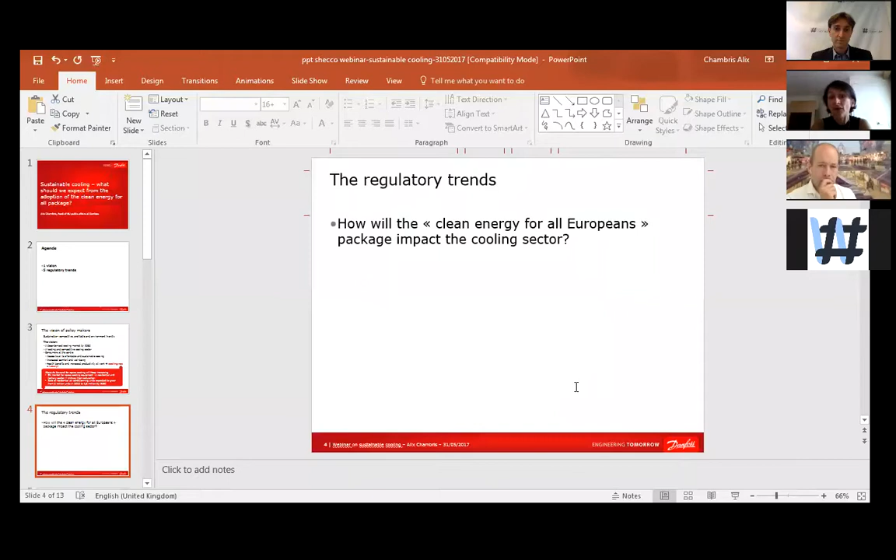And this is what the winter package, or so-called Clean Energy for All package, should help to deliver. So, five regulatory trends: how will the Clean Energy for All Europeans package impact the sector? Trend number one is that it will decrease the cooling demand, the relative cooling demand, at the building level. This trend will be driven by the Energy Performance of Buildings Directive and the Energy Efficiency Directive. If you need details, I can reply in the Q&A session.

So basically, there is a goal that the building stock should be fully decarbonized by 2050, that all new buildings should be nearly zero energy buildings starting in 2018 for public buildings and 2020 for all new buildings. And this will greatly impact the cooling demand and also products, because in highly insulated buildings it has a mixed trend. On one side, it should decrease the relative cooling demand.

On the other hand, in some cases it leads to the opposite effect, because of internal heat gains.

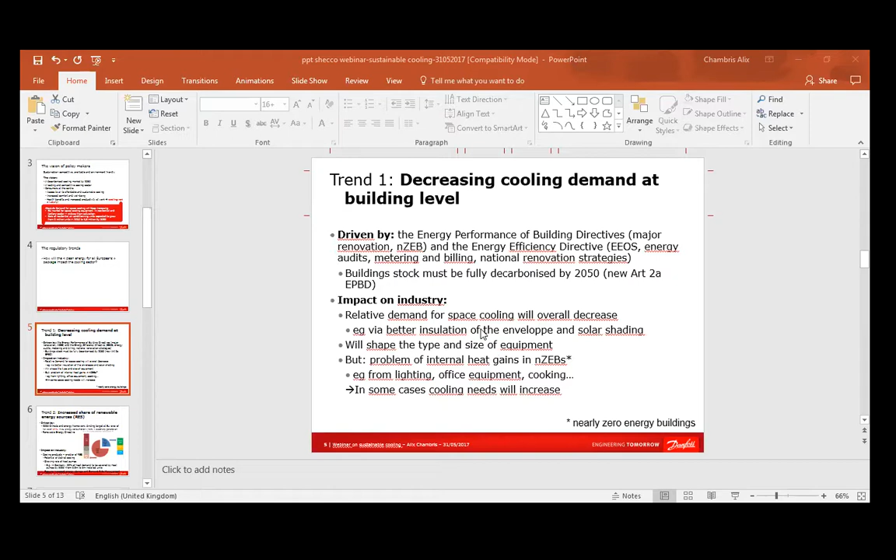And this will, as I said, impact product development for us. The next trend is increased share of renewable energy sources.

Someone is playing with my slides. I think we just put your slide on full screen. Ah, that's why. Okay, thank you.

So the increased share of renewable energy sources in the 2030 Climate and Energy Framework, it is already agreed that we should reach a binding 27% share of renewable energy in total EU energy consumption, leading to 45% in electricity generation. So this is quite an ambitious target. It might be even further increased within the negotiation on the Renewable Energy Directive. And this will also have a huge impact on the cooling sector for several reasons.

First, cooling products are enablers of renewable energy sources, and this means that heat pumps will gain a growing role. I will not talk too much about heat pumps because I know that Thomas Nowak will do it.

It means also that district cooling has a major role to play, and we have the example of Paris, where they developed a wide district cooling grid, very efficient, using the temperature differential of the river Seine. So again, the same for district cooling. I will not go into detail because Ingo will probably do that for us.

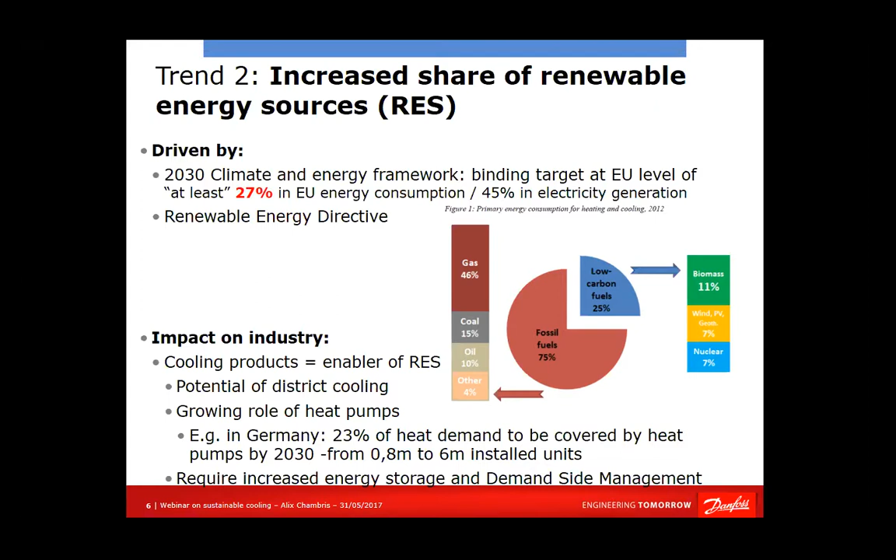And then, of course, a growing share of renewable energy sources means increased need for energy storage and demand-side management. I will come back to that later.

Another trend is the trend for more efficient and sustainable products, as already mentioned before. This is mainly driven by eco-design and energy labeling directives. What is important to know is that eco-design and energy labeling directives were stalled for a while, and within the Clean Energy for All package that was released at the end of November, the European Commission finally released the eco-design work plan. This means that work will keep on in this field.

Here I have listed some of the products that will be impacted. So the work on commercial refrigeration will keep going, as well as smart appliances. The work plan also defines new product groups that will be regulated under the eco-design and energy labeling framework, and that includes, for the cooling sector, refrigerated containers and building automation and controls.

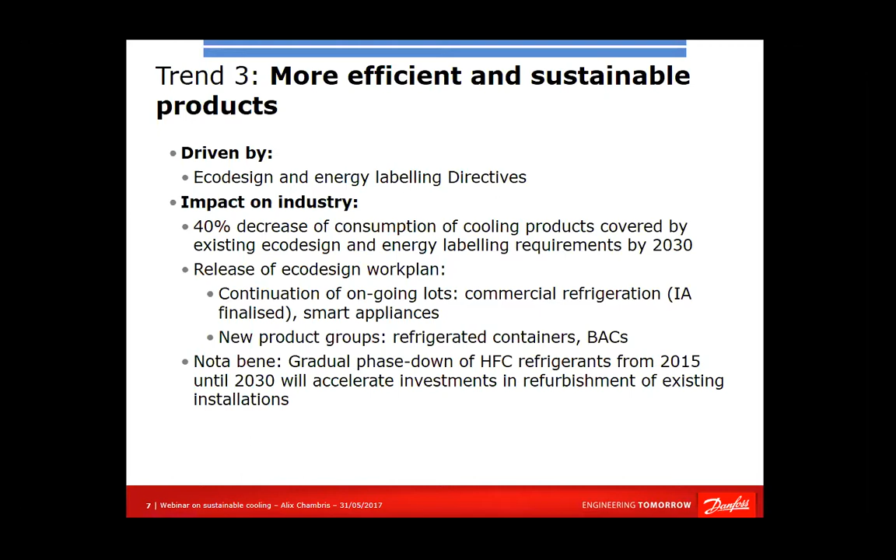And then I would like to emphasize that the gradual phase down of HFC refrigerants, set in the F-gas regulation, will also accelerate the market penetration of efficient and sustainable products, because it would speed up the refurbishment of existing installations. So this is rather positive for our sector.

Trend number 4, system approach. Eco-design and energy labeling have had a huge impact. They have led to a decrease estimated at around 40% of the energy consumption of covered products by 2030.

On the other hand, eco-design is only the first step. The next big game changer is a system approach. And the Clean Energy Package will really promote and accelerate optimization at system level. That's what we are convinced of.

The main drivers are Articles 8 and 15 of the Energy Performance of Buildings Directive, which promote the adoption of energy performance requirements for cooling systems, strengthening of inspection requirements, and, as an alternative, mandatory requirements on building automation and controls. The impact on the industry will be huge, both in terms of competitiveness, because you have huge efficiency gains to be gained from a system approach.

Another step change is the integration of heating and cooling. What is very important in this system thinking is the recovery of unavoidable waste heat in two directions. Cooling processes produce heat, and you can recover that heat, for example, for space heating. In a local supermarket in Denmark, the recovery of waste heat produced by the cooling process allowed annual savings on gas of 27,000 euros per year. So this has a direct impact on the bottom line of supermarkets.

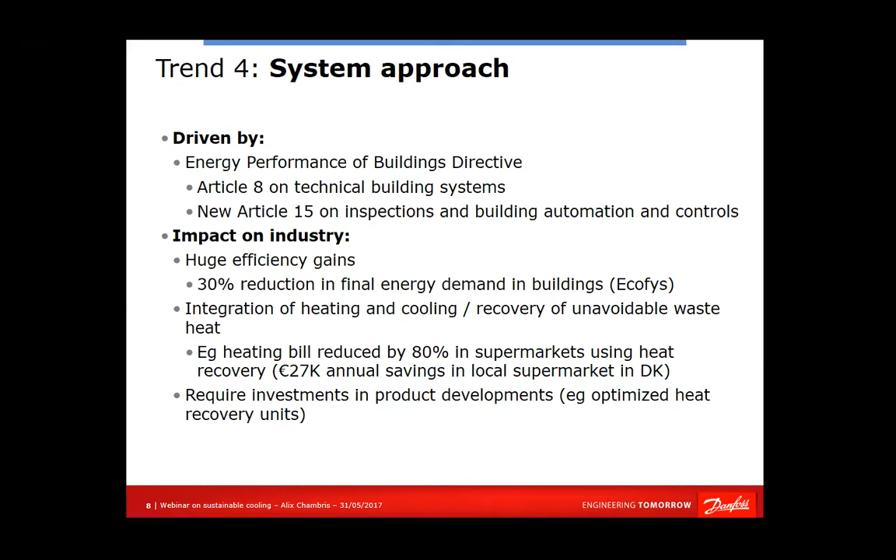But waste heat recovery can also be used in non-electrical cooling processes for cooling purposes. So this is a huge potential that requires from us, as an industry, a change of mindset and also investments in product development, for example optimized heat recovery units.

And the final trend I would like to emphasize is the growing digitalization that will be enabled by the package and sector coupling. This will be driven by the electricity market design regulatory framework and again the Energy Performance of Buildings Directive. So the impact on the industry, I have little time, so we can discuss that in the Q&A. Connected product, big data, Internet of Things, those are the buzzwords.

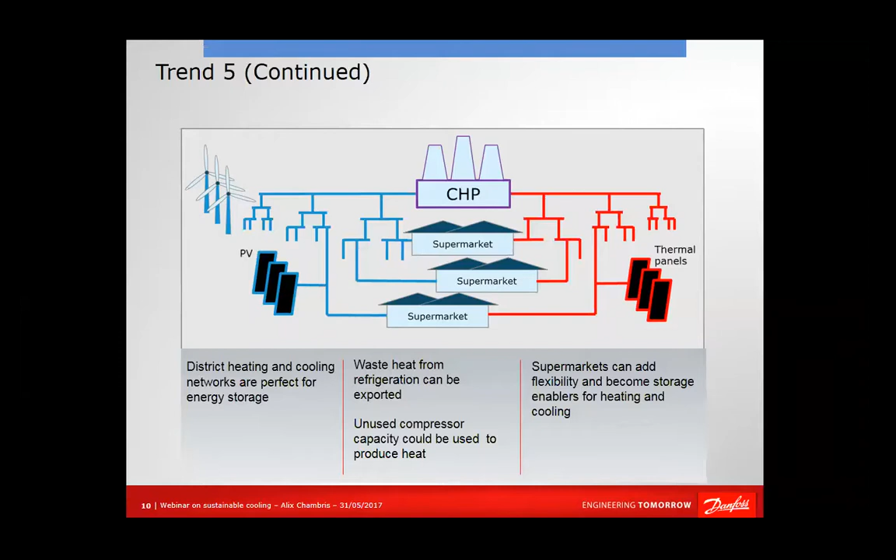There is much more. Another huge potential is the sector coupling. And here you see a picture of a supermarket to explain the vision. Supermarkets, for example, they can be turned into micro power plants. They can be used to store energy, to produce energy, for demand side management. So this is the next game changer in the upcoming decade.

So to conclude, I believe the Clean Energy for All package will bring four game changers in our sector. This is the system approach, the integration of heating and cooling, sector coupling, and the digitalization. Thank you very much.

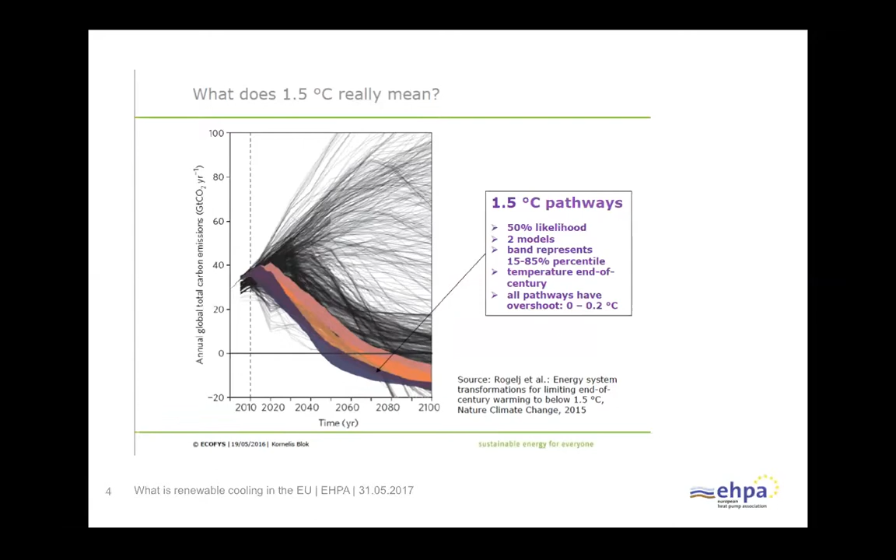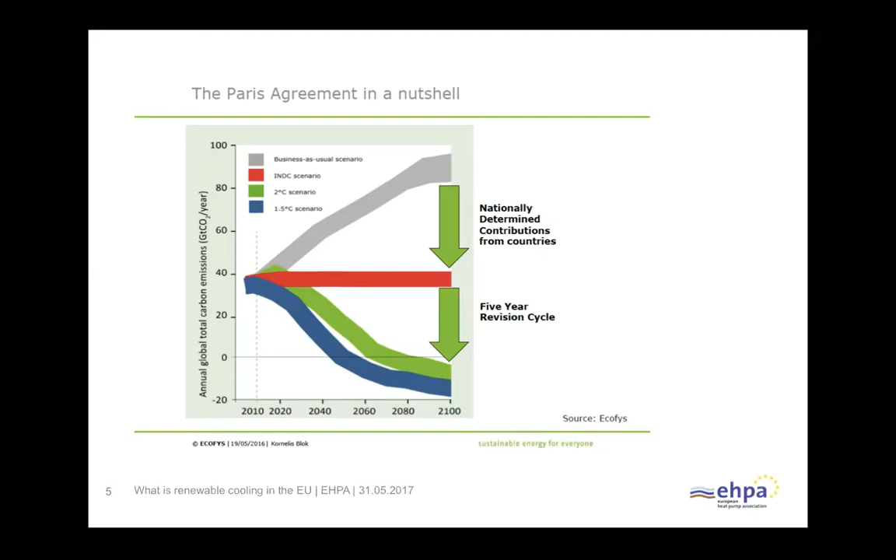And it's quite a distance between what would happen as business as usual, which is still supported by some people even here in Brussels, and what is necessary. You could say it's a full swing, a full turn of the whole industry. Next slide, please.

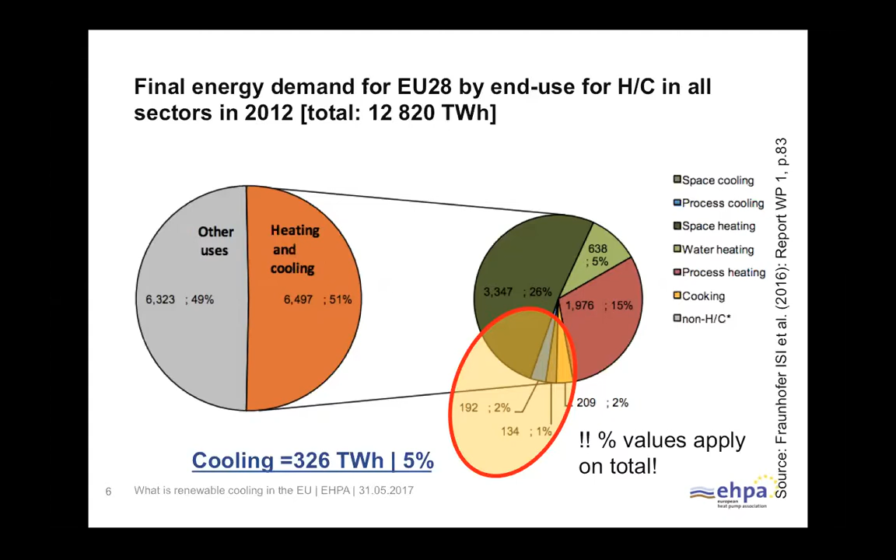And if we don't finish the heating sector in decarbonization terms, then we'll not achieve anything with addressing cooling. So it's very important to integrate the two and to go forward in the direction of the systems approach that also Alex has mentioned. Next slide, please.

So my interim conclusion on this is that we cannot decarbonize society, which is necessary, if we don't address heating and cooling. And we are also convinced, also in this group, that typically we have all the technologies available.

We know how to insulate a building. We also know how to cool it. We know how to do this with renewable energy. And so we don't really need additional technical innovation, but we need a legal framework that makes it attractive to use renewable and no-emission sources to provide heating and cooling to Europe. Next, please.

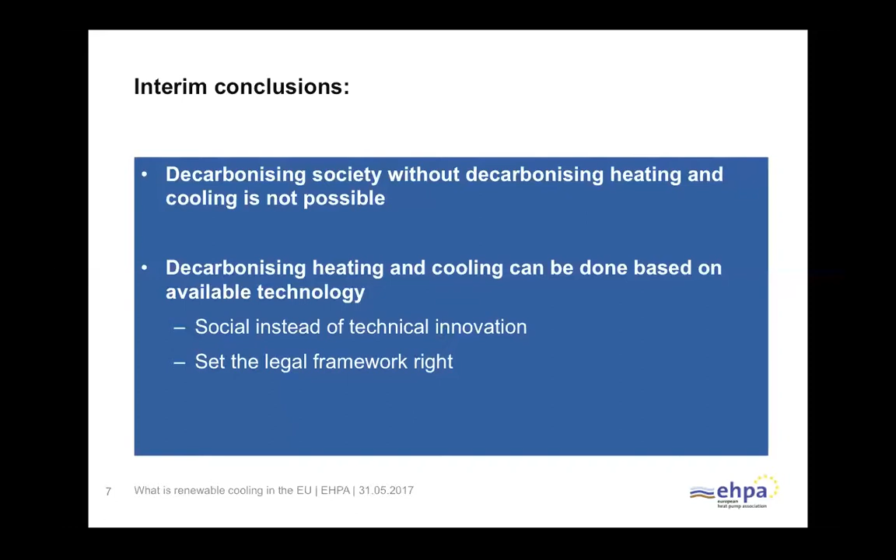And that is the really limiting factor, because the speed of change that we see at the moment here in Brussels, but maybe even worldwide, is not sufficient to achieve this. The renovation rate in buildings doesn't provide the necessary speed, and I guess in cooling it's the same. Next slide, please.

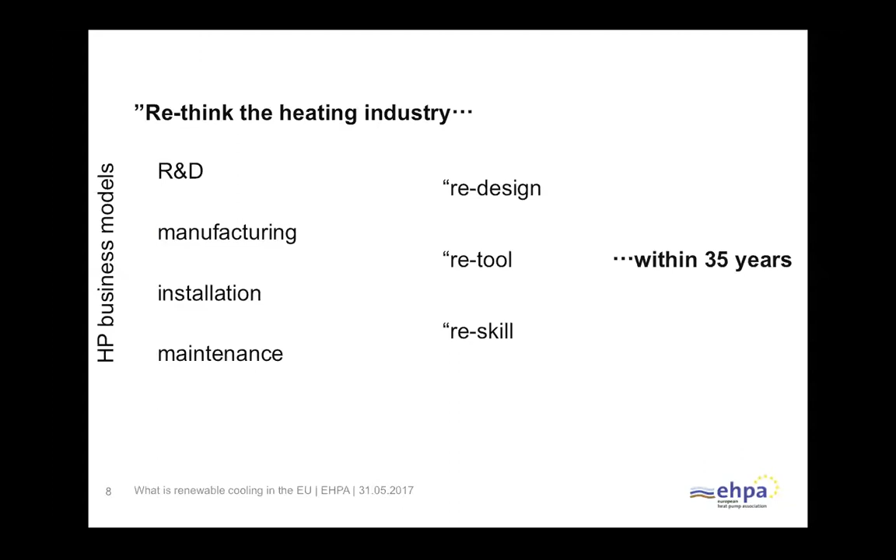So we created this DecarbHeat initiative, and the DecarbHeat initiative follows this vision of 100% decarbonized heating and cooling system in Europe by 2050. It has four components. It has an industry pledge that is signed by the major manufacturers of heating and cooling equipment, where they say we are ready to deliver.

It has a number of policy requests that go to policymakers saying, guys, you need to create a framework that makes it possible to align the individual decision makers' economic rationale and the 2 degrees centigrade global warming target. And then we have a support document that can be signed by many others that are not directly affected by renewable heating and cooling, but that are in line with the idea.

And as a next step, we will have an industry platform that is set up for fall. It will be set up in cooperation with the European Commission in order to determine how we can integrate the sectors in the most efficient way and how we can really achieve a decarbonized sector by 2050.

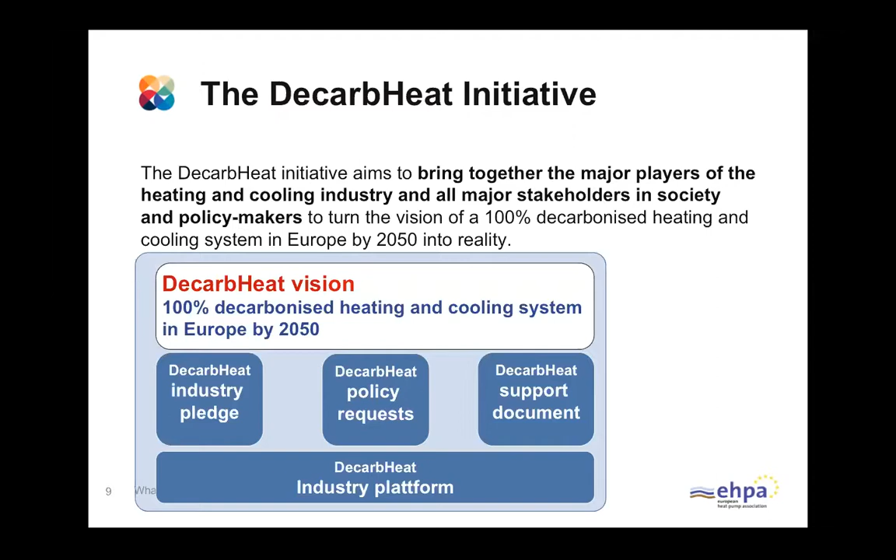And obviously, everybody in this room, if you have any interest in this, then please look at www.decarbheat.eu, and there is all the documents available for further study. Next slide, please.

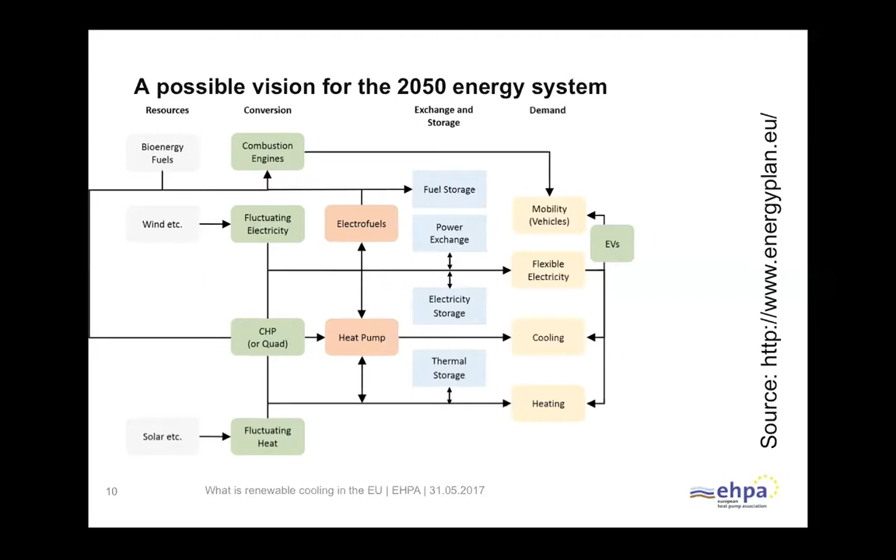In order to get there, we need a pathway, and this pathway is still open. I don't know anybody who has a proper idea so far of how to get there, let's say in 5-year intervals. And even if we talk about the Clean Energy for All package, that is not sufficient to bring us close to a decarbonized system. It can only be considered the first step.

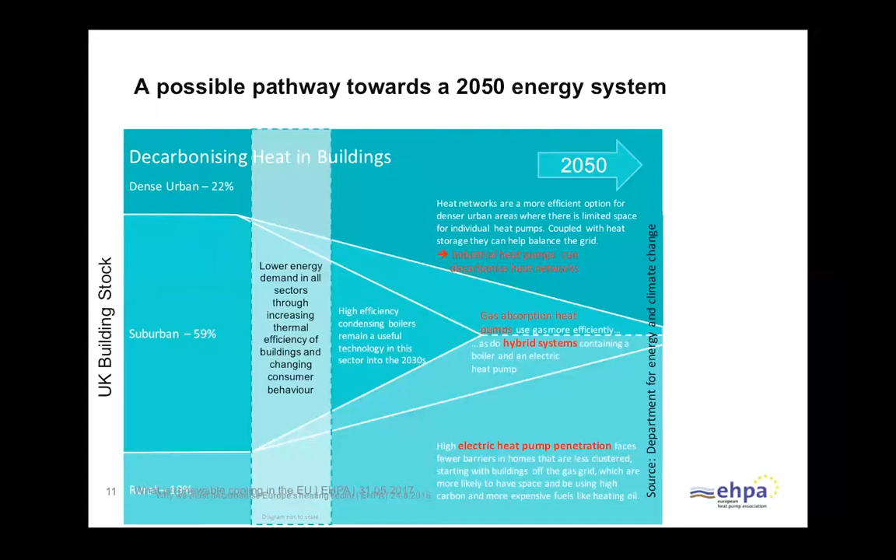So, renewable cooling - there were two slides on that. This is more or less my idea about this; it's not agreed with everybody else, so I put 'my' in front of it. That must be very clear.

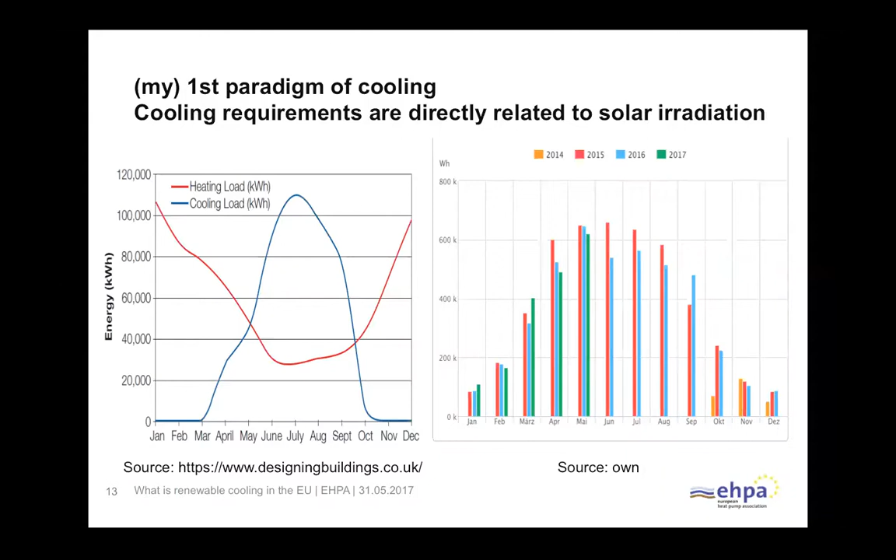My first paradigm of cooling is that you need to understand, if you need cooling, there is typically a direct connection to solar irradiation - that's what the two graphs show. Typically you need cooling more in summer, at least in the residential area, and in summer, in the future, we will have a lot of renewable electricity. So from an electricity and energy provision perspective, probably cooling is not such a big problem. I had a very intense discussion with a professor from the University of Leuven, and she said to me, Thomas, it's more important to reduce the energy demand in winter, in order to insulate the buildings. In summer, the cooling part, with proper design, we can handle.

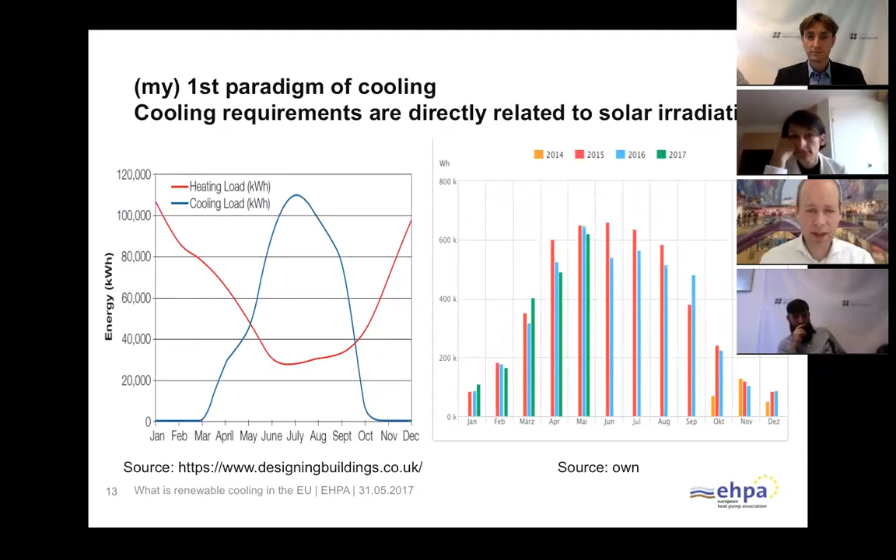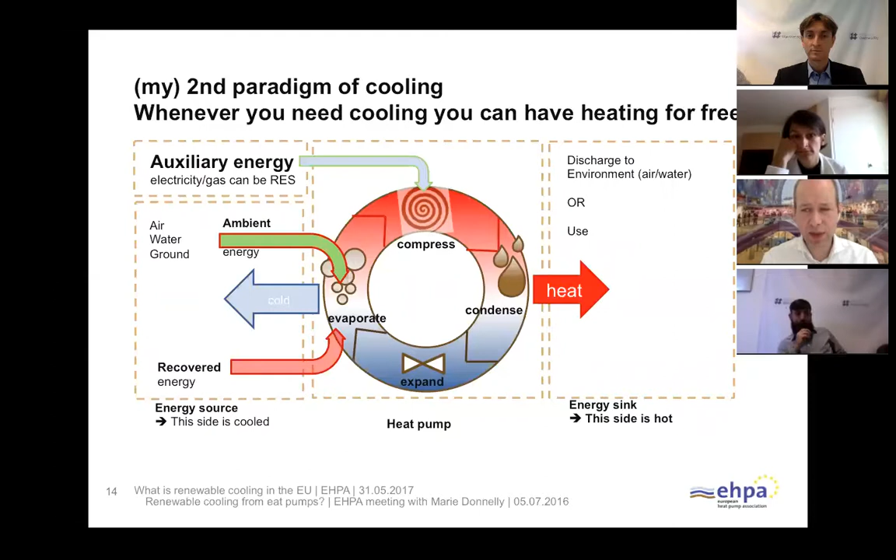My second paradigm of cooling is that whenever you need cooling, you can have heating for free - and that's what Alix also said. The cooling equipment in supermarkets is providing waste heat all the time, but it's not used at the moment. That's where the heat pump or refrigeration cycle comes into play: whenever we need the cooling part, we have heat for free. You can also say it the other way around - whenever you need heat, you have cooling for free. You can use it for district grids, for hot water production, or for other purposes like a swimming pool. This supports the idea that we need to integrate the different technologies - we have the technologies available, and we need to look at the design of the future system we want.

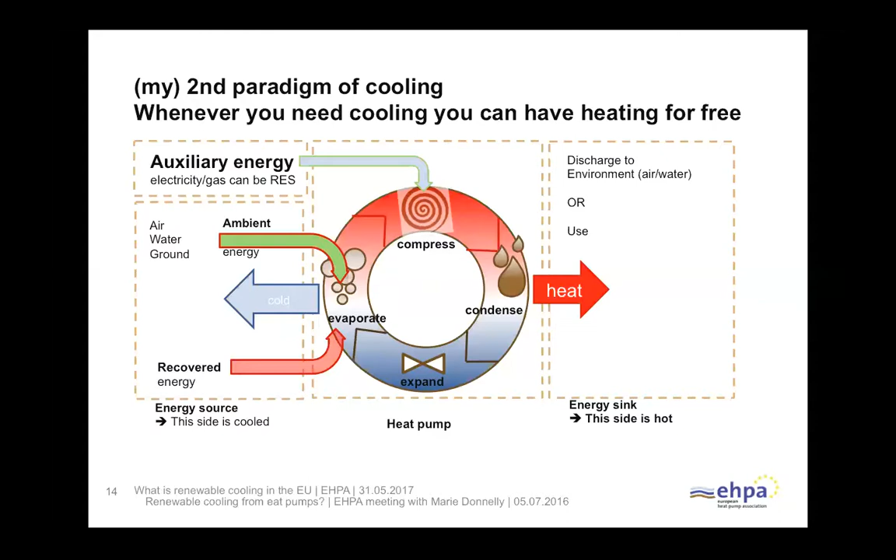I will close here because I think we are running out of time. Thank you.

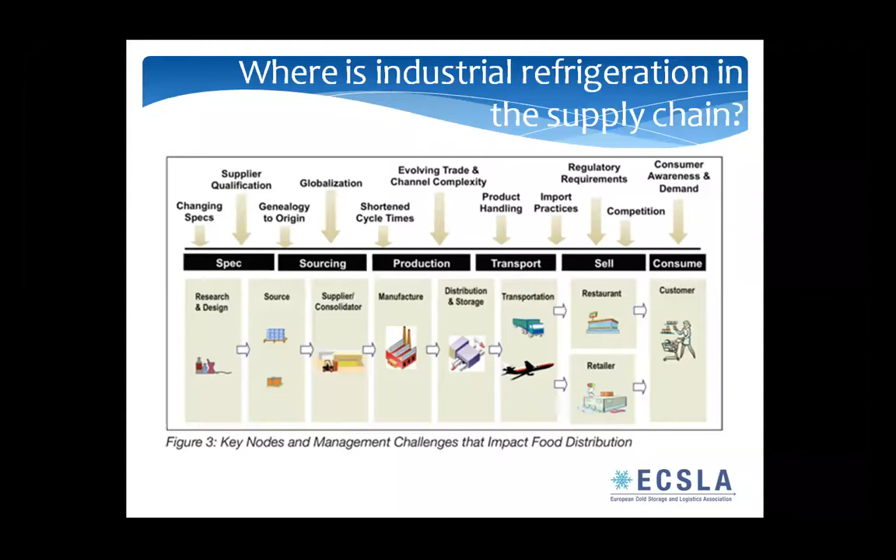They do customs and clearance checks, and they make sure that the cold chain is always preserved. So what do they do? In the refrigerated warehouses, which you have to imagine as basically a big box or a big fridge, you can regulate the temperature and all the products are stored in conditions appropriate for their specificities. So, for example, we freeze and store and distribute raw materials, fruit, vegetables, fish, also milk and dairy products, ready-made meals, convenient food, but also frozen food like frozen pizza and ice cream. And on the other hand, going away from food, there are also other products that need cooling or refrigeration.

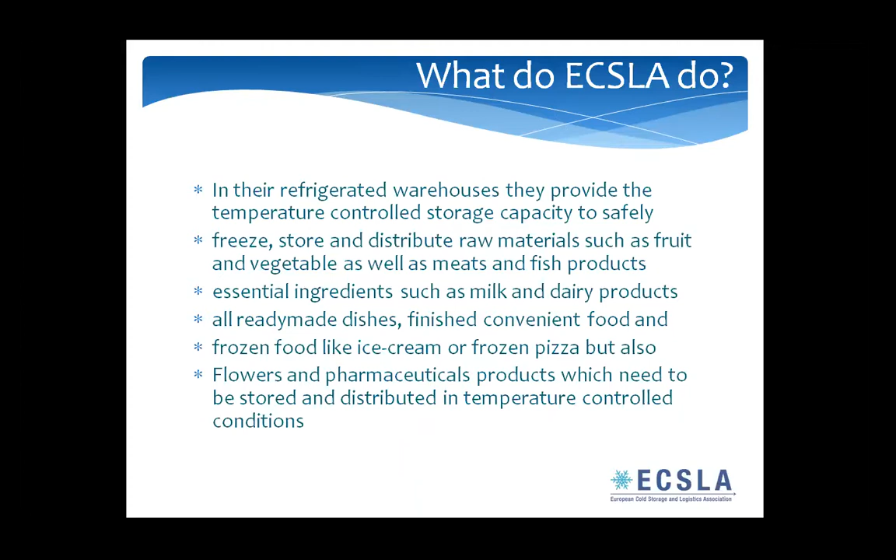That's flowers, for example, or pharmaceuticals, which are of course valuable products. All of those goods are stored in the cold stores of our members. But it's not so simple, because there's not just one kind of temperature. Different kinds of temperatures are required for different kinds of foods. You might have noticed that when you put a banana in the fridge, it doesn't last as long as it should.

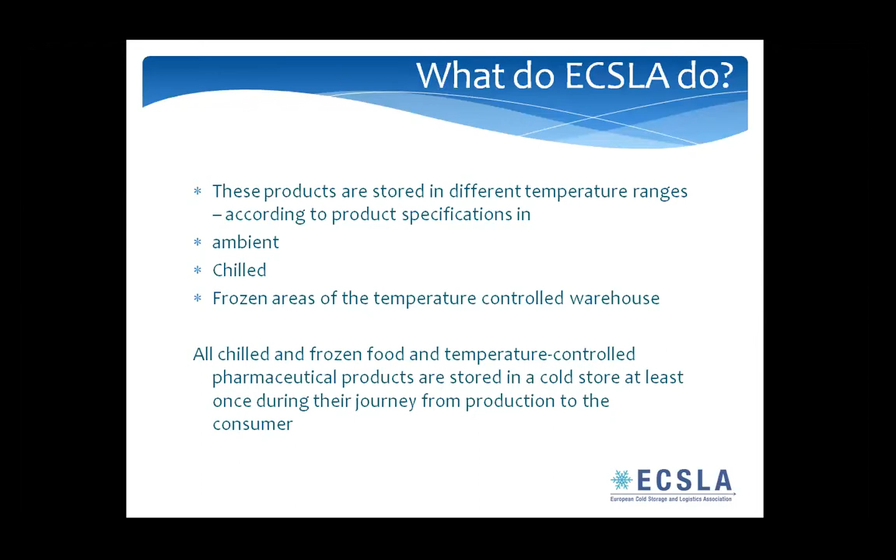So there are different temperature ranges: ambient, chilled, and frozen. Recently I visited a facility that has 20 different temperature ranges in its cold store. That's extraordinary, but it does exist. All chilled and frozen food, and temperature-controlled pharmaceutical products, are stored in a cold store at least once during their journey from production to the consumer. I think this illustrates very nicely the importance and the linking function of our sector.

As Ingo mentioned, we have a very clear lack of data that also concerns our sector, so we only have estimates of how big the sector is and how big the storage capacity is. We estimate there are approximately 2,500 public cold stores, 7,500 private cold stores, and more than 150,000 smaller cold stores. Public cold stores are a service from third-party logistics providers. The private cold stores are usually connected to the food industry, as well as the smaller ones. If you do the math, that's quite some capacity.